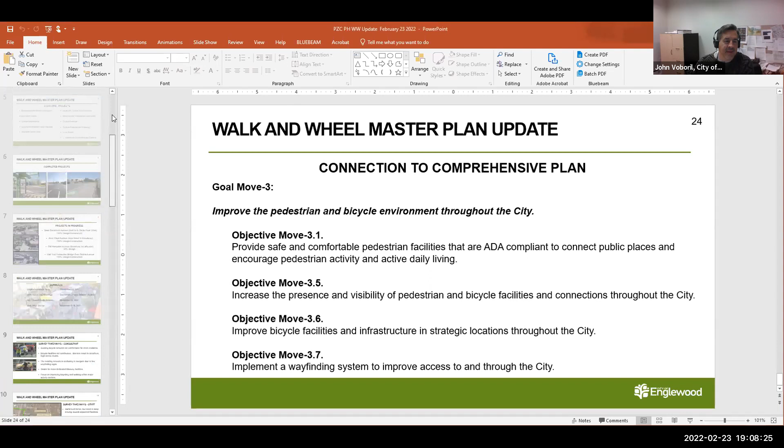Okay, I think we're ready to start. So I think I will start out and give you a little bit of background. I've been giving this presentation to a number of different community groups, and I think some of this information will be helpful and that you'll enjoy hearing about it.

I've been with the city since 2001, and shortly after that time I learned about what kind of bicycle planning the city had done in the past. In the 70s, the city established two different bicycle routes: one east-west on Dartmouth connecting Denver on either side, and a north-south route connecting from Sherman and Yale, making its way west over to Windermere and then down to downtown Littleton. That was about the extent of planning for on-street bicycle facilities since the 1970s.

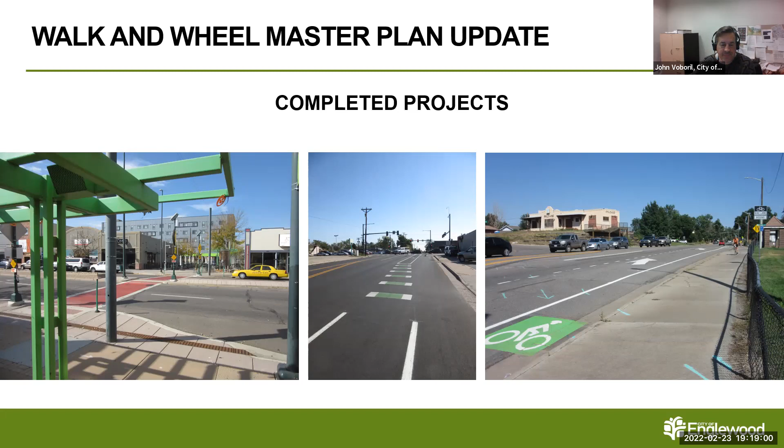And we also have some projects that are in progress. The Public Works Department has gone out and gotten some grant money for the West Dartmouth Avenue project, which is from Zuni to South Platte River Drive. So we can extend our Dartmouth corridor even farther west, looking at 100% design construction.

We also have West Floyd Avenue. Once again, Public Works got some grant money to do the segment from Inca Street to Broadway. And then looking at Old Hampden Avenue, this has just gone out. Public Works has selected a consultant to do some design work for the segment of Old Hampden from Broadway to Lafayette. We're going to get for this project about a 20% design level, and we're hoping to use that to go after additional grant funds to complete the project.

And I believe also the rail trail pedestrian bridge over Oxford Avenue has recently been finished, the design work for it. The construction, as I understand, will take place later this year.

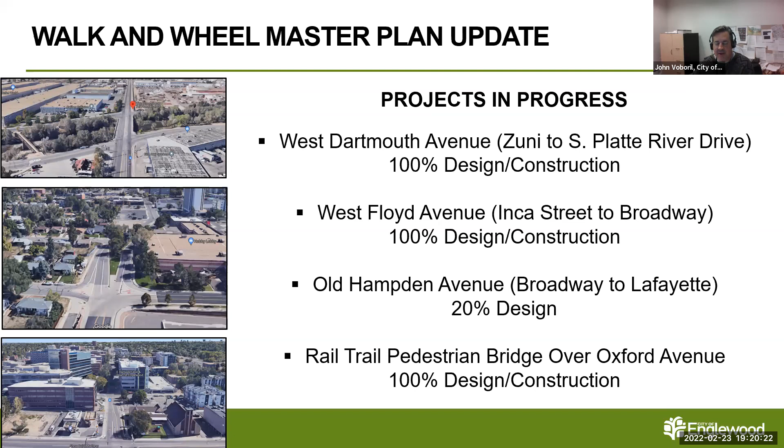All right, let's turn to outreach. So we started this project in September, or August, September, in that time period. The first thing we did was, hey, we know about this Englewood Block Party, so we better get our consultants out there. The consultants had a booth on Broadway on September 18th, and they were able to make 50 contacts with people who are interested in learning about the project and giving their feedback.

And then we wanted to schedule some joint Planning and Zoning Commission and Transportation Advisory Committee meetings. Those were held September 21st and October 14th. We held a City Council study session on November 22nd. And then we wanted to do a webpage survey to reach out. We have a great communications department these days, and they really know how to get the word out through social media. That survey went out and was available from November 5th through the 19th.

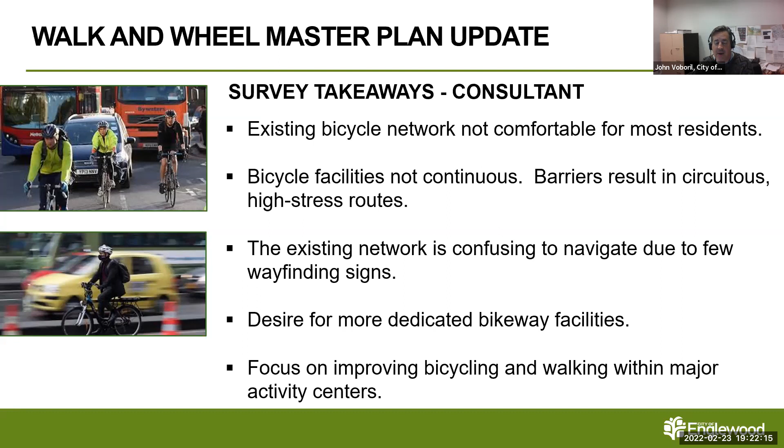Survey takeaways—this is the consultant's take. Existing bicycle network is not comfortable for most residents. Facilities are not continuous and barriers result in circuitous and high stress routes. Existing network is confusing to navigate due to few wayfinding signs. There's a desire for more bikeway facilities. And generally the thought from the survey was that the focus should be on improving bicycling and walking within our major activity centers.

And so I looked at all of the comments in the survey too, and there were 341, I believe. So that was a really good response rate. And what I took out of it was that I saw a lot of comments saying Dartmouth is a lot better than it was, but the city needs to keep moving towards separated facilities.

On the Dartmouth corridor, because there are a few places with quite a bit of parking that residents living on that corridor utilize, we decided that in order to make this go faster, we should concentrate on kind of a shared parking bicycle lane facility. But it seems to me that people want us to keep moving towards a more separated type of facility, either removing parking altogether or being able to delineate separate parking spaces, lanes, and separate bicycle lanes.

I also saw a lot of comments about how sharrow markings in lieu of separated lanes aren't really all that great. People don't feel that comfortable with them, especially on a busy street. One of the early streets that we did was Clarkson Street, and that has shared markings. Clarkson Street is one of those in-between streets where it's not an Oxford or a Dartmouth, but it's probably busier than your local Sherman Street. It's something people like to use as a cut through, so that's something we need to think about as well.

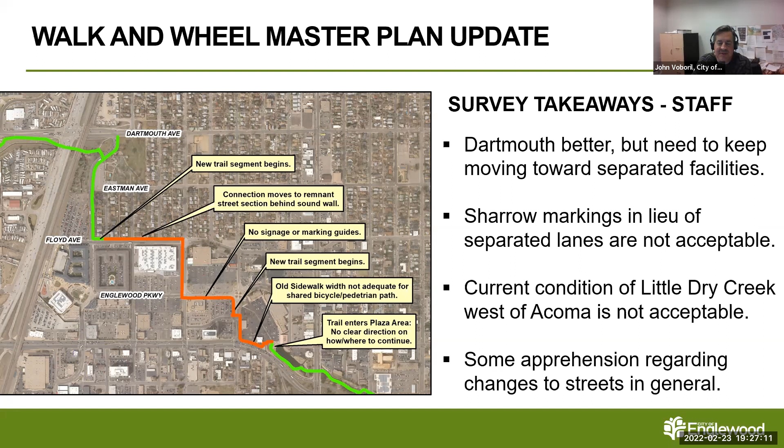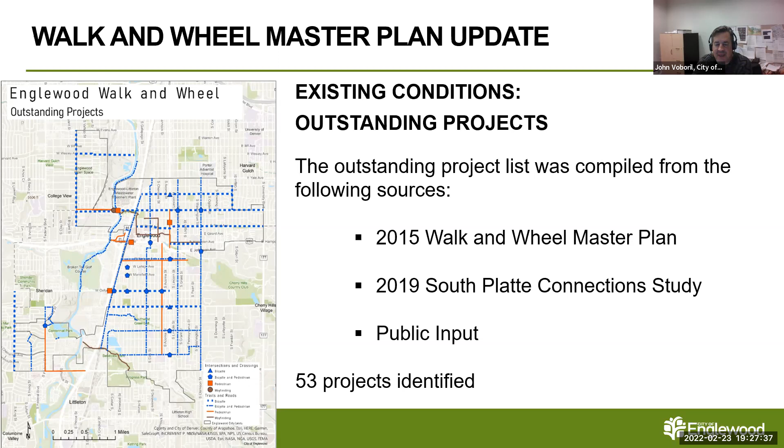So, existing conditions: the planning consultant started off, and after we've identified what we've done, they compiled the full project list, and that was compiled from the 2015 Walk and Wheel Master Plan, as well as the 2019 South Platte Connections Study and public input. 53 projects were identified.

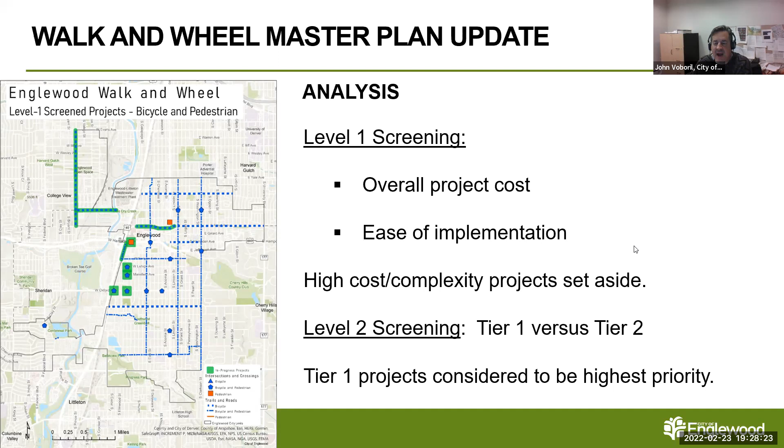So the analysis started off including 2 levels of screening. The first was the level 1 screening, which looked at overall project cost and ease of implementation. Projects deemed high cost, high complexity were set aside. The remaining projects were then taken through the level 2 screening, and those were divided into tier 1 versus tier 2, with tier 1 projects considered the highest priority and easiest to implement.

The criteria used included the following: they looked at connectivity, cost, and demand. With connectivity, some of the measures are how it improves connection to key destinations and how it improves access to transit. A rating system was established: 1 for no change, 2 minor, 3 moderate, 4 substantial. They went through a subjective exercise to rate each corridor and give it a score. Same with cost, only this time 1 point was given to the highest cost projects and 4 points given to the lowest cost projects.

With demand, does the corridor respond to stakeholder input and community input? And does the project fall within the 15-minute city radius? So just a little bit about the 15-minute city radius.

That is a fairly new concept that we heard from Councilman Anderson about. One of the things we wanted to do was take things that people wanted to go to—grocery stores, parks, schools, medical clinics, or other shopping activities—and map those all out. We created walk sheds and bike sheds: a 15-minute walk shed and a 5-minute bicycle shed around all those things. So if a project or corridor fell within those walk sheds or bike sheds, it got extra points for that.

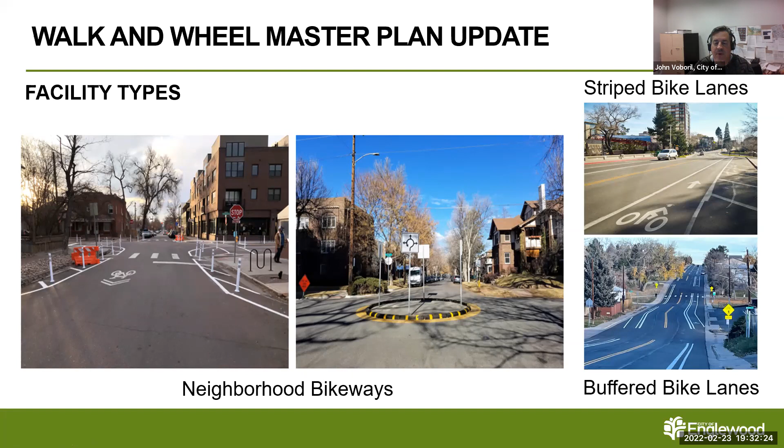All right, let's talk a little bit about cost estimates. These are per-mile costs for different types of improvements. The cheapest is the traditional striped bicycle lane, with a planning cost of about $3,500 per mile, a design cost of $5,000 per mile, and a construction cost of $41,500 per mile, for a total of about $50,000 per mile.

Buffered bicycle lanes are a little more expensive. There's more paint involved, so that cost goes up to about $75,000 per mile.

Then there's the neighborhood bikeway improvements, which are much more expensive. These involve more physical improvements to a street and a lot more planning, since you need full master planning and community meetings to look at alternatives and get buy-in. Planning costs for neighborhood bikeways start at about $49,000 per mile, design costs are $80,500 per mile, and construction costs are $220,500 per mile, for a total of $350,000 per mile. These estimates come from the consultant's experience being highly involved with similar projects in Denver over the last couple of years.

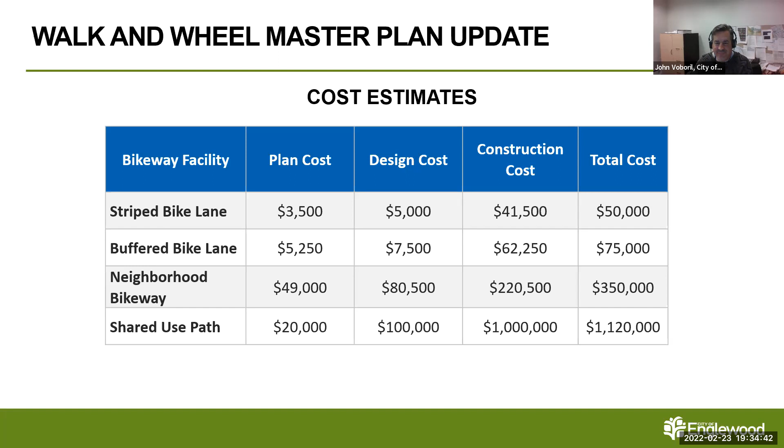So they took all of the projects and rated them on all those different levels and criteria, and this is the result. Our highest performing project is Sherman Street, with a prioritization score of 41.

Some other projects included here had to be divided into different segments because it would be too expensive to do the whole corridor at once, from Yale all the way down to Chenango or Bellevue. So we broke them up into three different segments, and the Sherman Street segments all scored pretty high, at 41 and 39.

Probably our second most important corridor is the Elati and Fox Street corridors. This makes a lot of sense because we've mostly worked on east-west corridors up until now, like Dartmouth and Oxford, and we really need to start adding in some north-south corridors to have a nicely connected system.

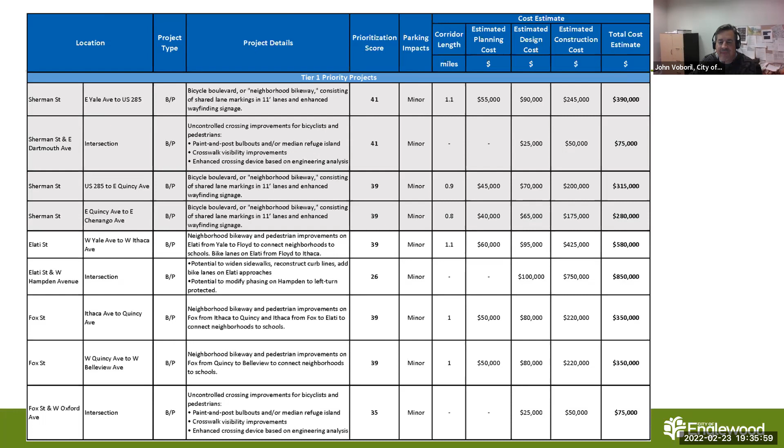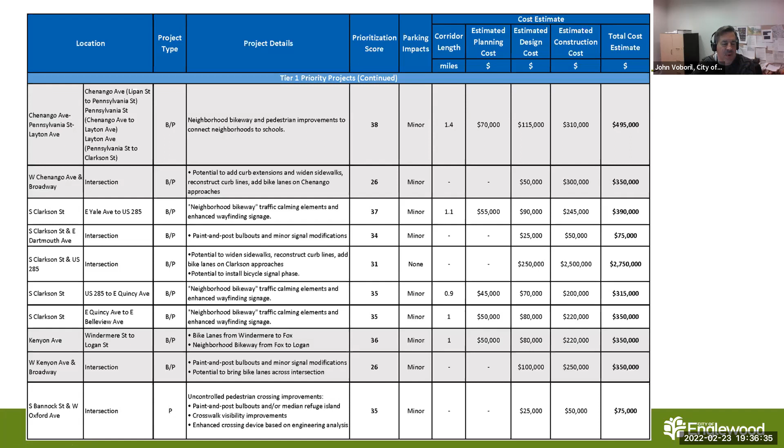Some other corridors included here are Clarkson Street as well as the Chenango Avenue corridor. Kenyon Avenue is in there too, and scattered amongst this are some pedestrian-related intersection improvements. Further down we have South Bannock Street and West Oxford Avenue, which is more of an intersection project that would include not only bicycle improvements but also walking and crossing improvements.

Quincy Avenue and Bates Avenue fall a little farther down the list. We also have the Southwest Greenbelt and Floyd Avenue from Broadway to University. However, that one is a fairly low-cost project, so we may see it sooner rather than later.

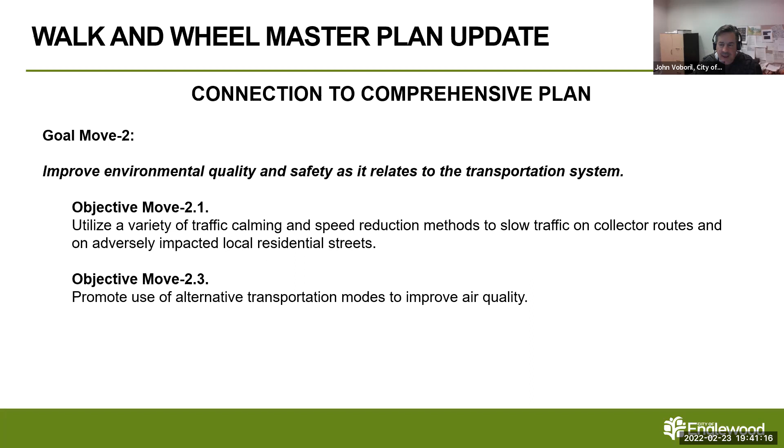And I believe that concludes my presentation. I'm going to stop the share of the screen. At this time, I would like to open it up to any questions that you may have of me.

Any questions? Yep, Meg? Thanks, I was curious about — well first, this is all very exciting, I'm glad to see these projects planned. My question is about the dedicated funding for capital improvement projects for this plan. What does that look like? Is it a percentage of funding each year? Is it a flat amount? Will it vary year over year? Or is there dedicated funding, I guess?